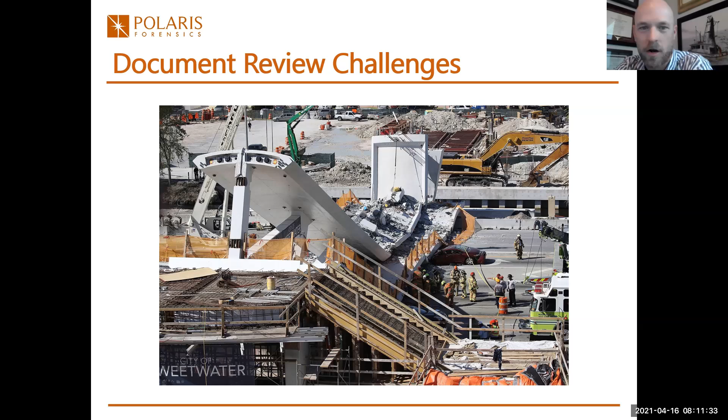So for some projects, probably more applicable to public projects, nowadays there's a lot of information that can be found online. Again, using the FIU pedestrian bridge collapse as an example, we were able to track down all sorts of pertinent information just by doing a pretty simple Google search and becoming an online sleuth. We were able to find construction drawings, photographs, specifications. In addition to looking online, you can perform an open records request and track down information that way. So the point of this is that if it's proving difficult to track down information through traditional channels, there are other ways to find things.

Data collection consists of on-site work, off-site testing, and off-site research. Some examples of on-site activities would be photographic and video documentation, collecting measurements such as building dimensions and framing member sizes. It's also not uncommon for some projects to use non-destructive testing techniques to collect data.

An example would be using ground penetrating radar to identify the reinforcing steel layout in a reinforced concrete member. For some projects, it's also not uncommon to collect material samples for testing at later dates, such as obtaining concrete core samples for compressive strength testing or petrographic examination.

Some examples of off-site research would be looking at weather data through various weather sources, looking at soil information through the USDA Web Soil Survey website, and looking at historical aerial images, such as from Google Earth or Pictometry or some other source.

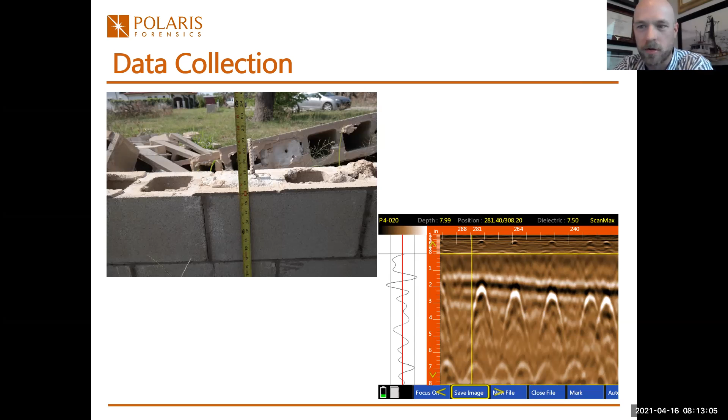Interviewing witnesses isn't always allowed, and that's probably more true for legal projects than anything else. But if allowed, it is important to get a firsthand account of the loss. This not only provides valuable information, but can also help piece together a timeline of events. Let me share a story with you.

Many years ago, I was looking at a high-end residential house for hail damage. When doing hail investigations, a big part of what I'm trying to determine is what size hailstone fell at that particular site. For this project, I had the opportunity to talk to the homeowner and asked some general background questions, including whether she was home during the storm and if she had any idea what size hailstone fell.

She excused herself, went inside her house, and came back out with a Ziploc bag full of hailstone balls. What had happened was that she was home, and after the storm had gone into her front yard and picked up these balls and put them in her freezer. Half my investigation was over because I knew what size hail fell at that site, and I had that information because I had the luxury of being able to interview the homeowner.

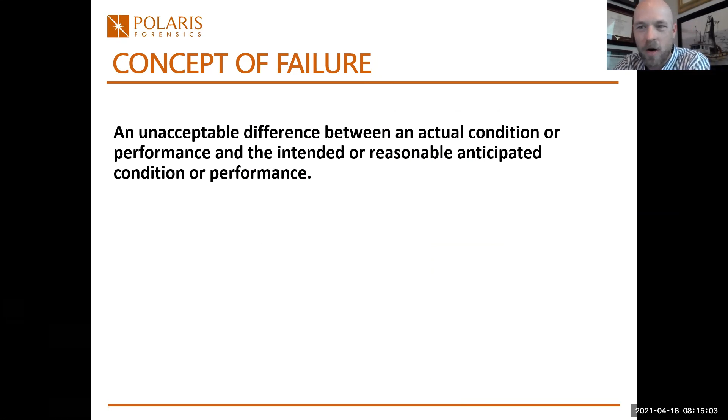The concept of failure is defined as an unacceptable difference between an actual condition or performance and the intended or reasonably anticipated condition or performance. That's a mouthful. Things fail for many different reasons, and I'll walk you through some of the more common causes of failure.

One of those causes is material defect. This is a good example that highlights that. This is a clay tile roof that I was asked to look at many years ago for hail damage. You can see in this image that there are all these little surface spall marks on this clay tile, and my initial impression was that this could possibly be hail related.

But I was able to lift up this lap seam, where the upslope tile laps down and over the immediate downslope tile, and that area is shielded and protected from overhead impact. I was finding these same spall marks, which was basically the smoking gun that told me this wasn't related to hail impact. At each of these spall marks, there's a little white dot or speck. It turns out that when they were manufacturing this clay tile material, it was manufactured inadvertently with limestone inclusions, and that limestone material over time absorbed water, expanded, and created these surface spall marks.

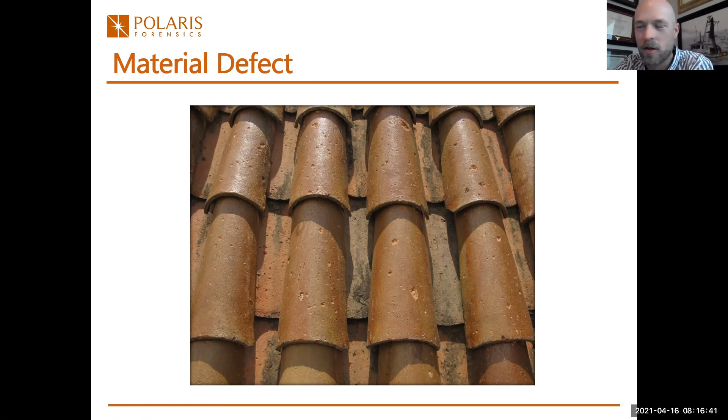This is a good example of what a material defect might look like. Overloading is another common cause of failure, and this almost always happens inadvertently. Nobody intends to overload anything.

A good example of this is I was recently asked by the City of Austin Fire Department to investigate a couple of their fire stations. The fire department at two stations in particular had upgraded their ladder vehicles, and these ladder vehicles were considerably heavier than the vehicles they replaced in their fleet. The fire department kind of did things ass backwards - they upgraded these vehicles.

They were operating these trucks in and out of two fire stations, which had suspended reinforced concrete slabs. All of a sudden a light bulb went off one day, and they thought, well, because these trucks are so much heavier, maybe we should involve an engineer to look at our floor system to make sure it's capable of withstanding this additional weight. So that's kind of where we got brought in.

One of these fire stations was built in the 50s, I think the other one was built in the 70s. Of course, nobody had maintained any drawings or construction documentation, so we basically had to go in and do a full as-built condition assessment from scratch.

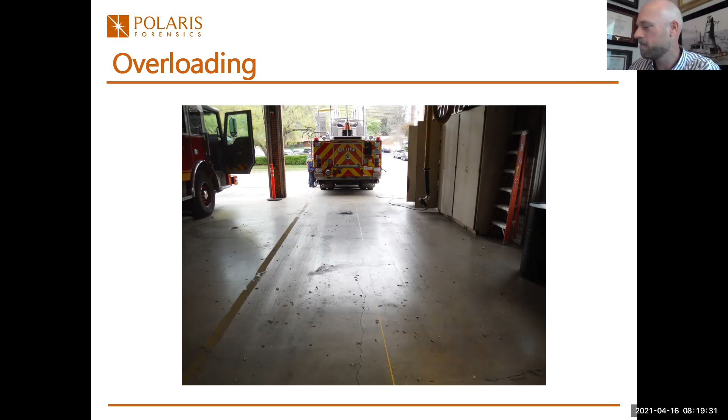As you may or may not be aware, moisture can do all sorts of crazy things. This is a photograph taken in an underground parking garage for a pretty high-end hotel facility in California. What you don't see here in this image is that above this underground parking garage is this pretty massive outdoor recreational space, almost like a big courtyard. In this courtyard, they had a swimming pool and a lot of nice landscaping.

It turns out that both the swimming pool and the sprinkler system for the landscaping were leaking, and water was just pouring into this underground parking garage like it was a sieve. What happened is that over time, that water—and I should mention this is a post-tensioned slab—worked its way into the ducts of this post-tension system, and it corroded and basically failed the PT tendons.

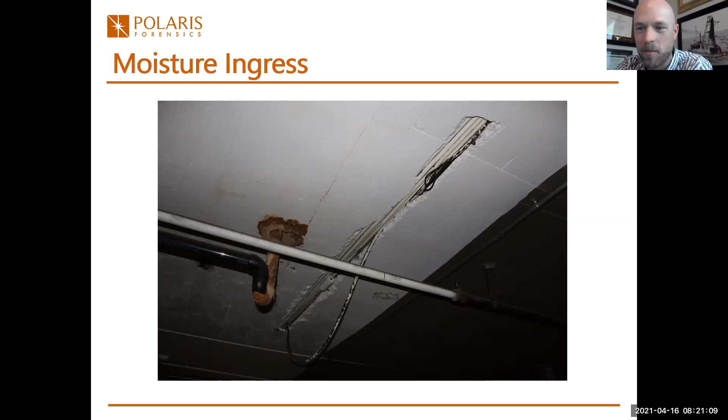I'm going to cover, in a little more detail, the FIU pedestrian bridge collapse. This is a good case study that highlights a design defect. Just as a caveat, there is a lot of active litigation ongoing as a result of this collapse and failure, so I can't provide any insider information. But I will tell you that there are multiple reports out there issued by both NTSB and OSHA, and these are readily available online. Based on my involvement in this project, the findings in those reports are very spot on.

This bridge was constructed using accelerated methods. In this particular case, it was actually constructed in an adjacent yard right next to the roadway. They were able to do that and construct the bridge while keeping the roadway open, basically minimizing traffic disruption.

When that bridge was close to being completed, they moved it into position on the piers. They did that in the middle of the night, closing traffic to the road for not more than a few hours. They moved it into position, put it on the piers, and then it was in its final resting position.

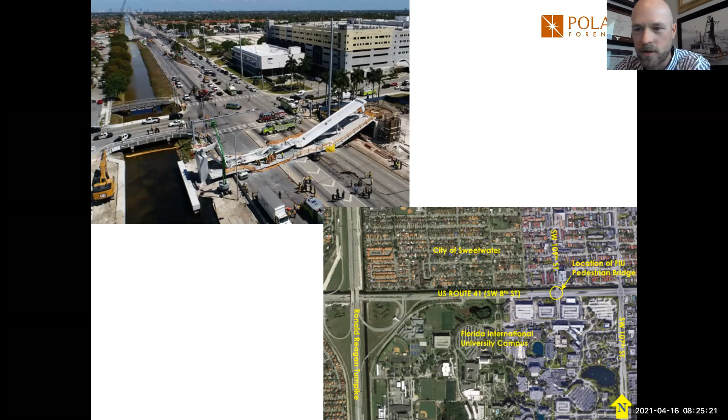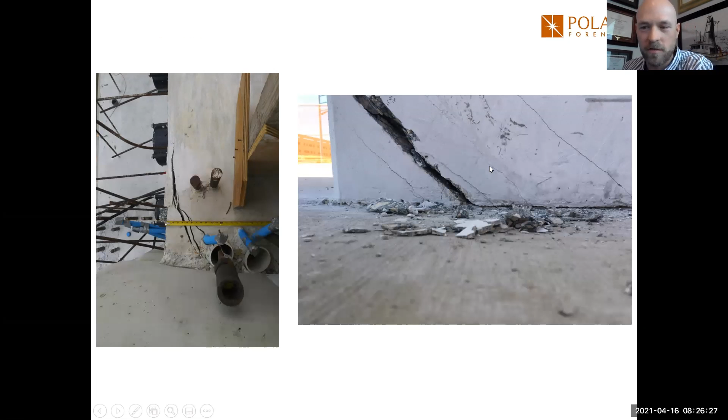To give you some reference on where these cracks are located, this image on the left is a top-down bird's eye view looking at this node right here. I will tell you that this is where the failure initiated. This image on the right is an elevation view looking at the bridge from the side, again at this node at the end of the bridge.

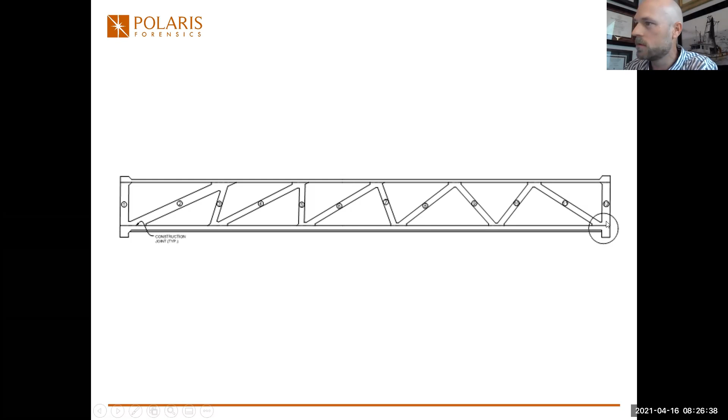This was brought to the attention of the contractor and the design engineer. It's our understanding that FIGG, the design engineer of record, further evaluated this issue. They purportedly did some additional analysis, looked at their design, and for whatever reason ultimately concluded that these cracks were not a safety issue. Because they deemed them not to be a safety issue, they didn't close traffic to that roadway, and they didn't install any sort of temporary shoring.

Coincidentally, on the day of the failure, March 15th, that morning, both MCM the general contractor, FIGG the design engineer of record, and the Florida Department of Transportation were meeting on site to discuss this bridge and this cracking issue. Based on meeting minutes we were able to get our hands on, it turns out that meeting adjourned, I believe, an hour or two before this bridge collapsed.

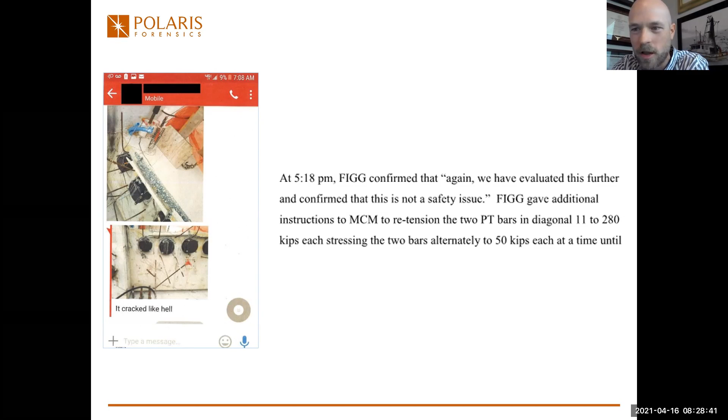It turns out that the shear capacity of that connection was incredibly under-designed. It didn't even come close to being able to withstand the loads that it should have been designed for. It's unfortunate that happened. That shouldn't happen.

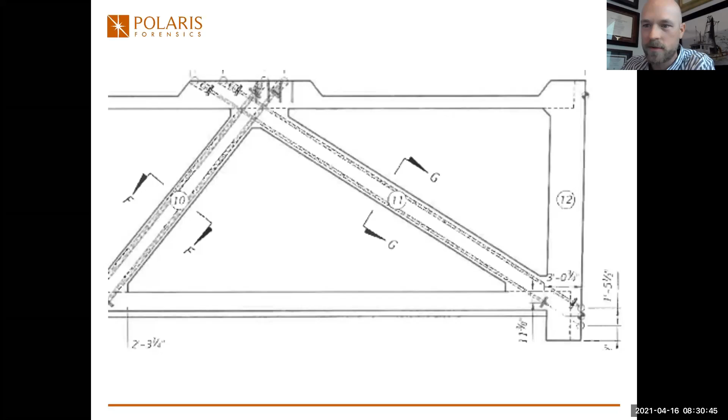All right, so standard of care is also known as the duty of a professional, and it's defined as the level of care normally practiced by a reasonable and prudent professional under similar circumstances during the same time frame. In other words, as a design engineer, am I using applicable codes and standards that another prudent engineer would use to design some sort of structure or member? I also want to mention that if this standard of care is not met, the design engineer can be found negligent.

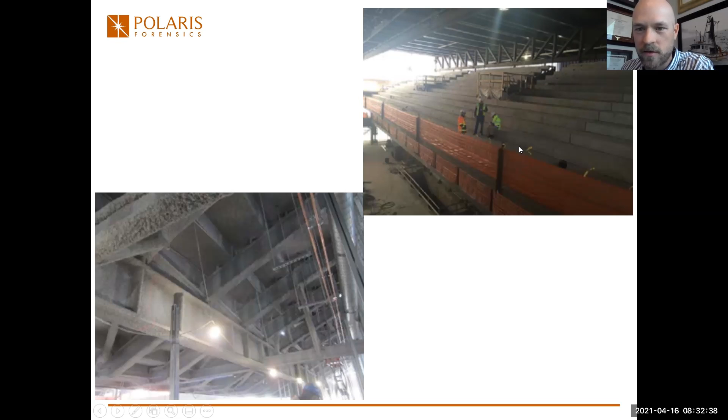This is a predominantly steel framed structure. So you've got these inclined steel rakers that are supported on pretty massive steel girders that are further supported on steel columns. And the seating for the balcony consisted of precast concrete panels.

So it turns out that almost immediately after this balcony structure was erected, it became obvious that there was a vibration issue. The attorney we were working for on this project liked to joke that there were workers at the edge of the balcony, this thing was vibrating, they got sick and threw up off the side — which didn't happen, it was a tongue-in-cheek comment — but the point he was trying to make is that this wasn't subtle. It was a very obvious vibration issue.

Because they had this vibration issue, the original design team had to design a retrofit, which then had to be installed to alleviate this vibration issue, which it did. But, as is the case with projects like this, this turned litigious. And the owner sued the original design team to basically pay for the delay in the project and the additional cost of installing this retrofit.

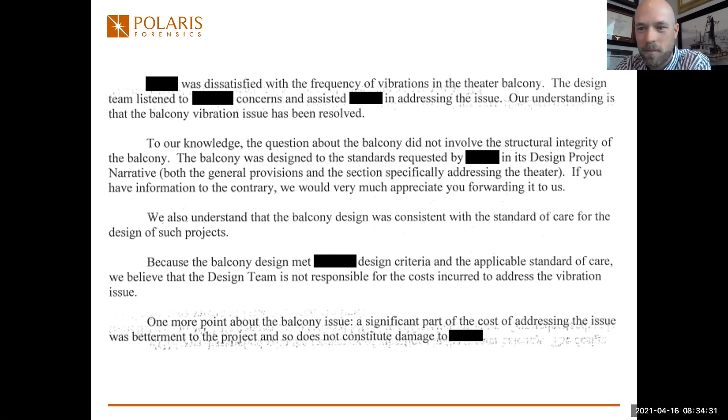The original designer maintained in their defense that because the structural integrity of the balcony wasn't compromised, which it wasn't, the retrofit that had to be designed and installed was considered, quote unquote, a betterment to the structure. So we were asked to investigate this issue to, for the most part, determine if there's a standard of care issue here. Should vibration serviceability have been considered in the original design?

So if you were to look at the structural notes on the construction drawings, it would refer you to IBC 2012 as the governing building code. And section 2205 of that code would refer the reader to AISC 360 for structural steel. Commentary section L5 of AISC 360 says floor vibrations have become an important design consideration.

In addition to that, it refers the reader to this Design Guide 11 document. So in addition to AISC 360, both the Steel Construction Manual and ASCE 7, both very well-known industry standards, also discuss vibration serviceability. And the Steel Construction Manual also references this Design Guide 11 document.

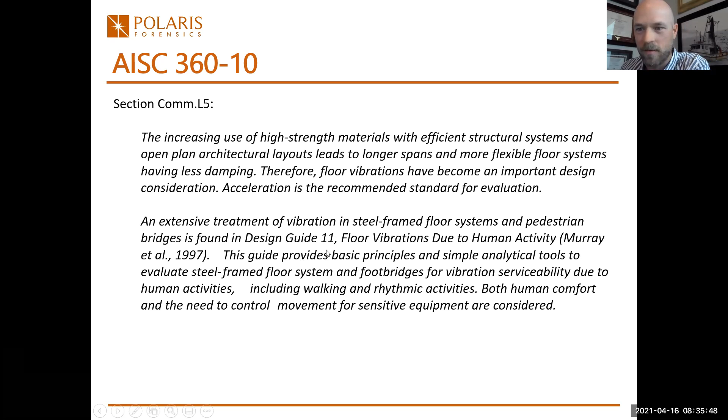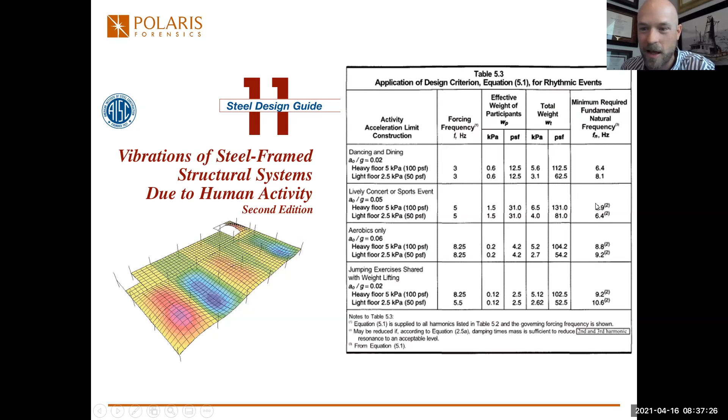So we created a finite element model of this balcony using engineering software. We performed a dynamic response analysis, and based on that analysis determined, drum roll, that the fundamental natural frequency was 3.41 hertz. So if you go back to this table here, you can see that that is fairly substantially less than what it should be.

Well, it turns out that, in addition to our involvement, there were two other experts involved on this case, including the design team's, or the defense's, own expert. And both of those other experts reached the exact same conclusion, that the fundamental natural frequency of this structure was less than what it should have been.

So it turns out that this is definitely a standard of care issue. Vibration serviceability should have been considered. It was a requirement per applicable codes and standards. And because it wasn't considered, they had a vibration problem that had to be fixed. And that retrofit that had to be installed was certainly not a betterment to the structure.

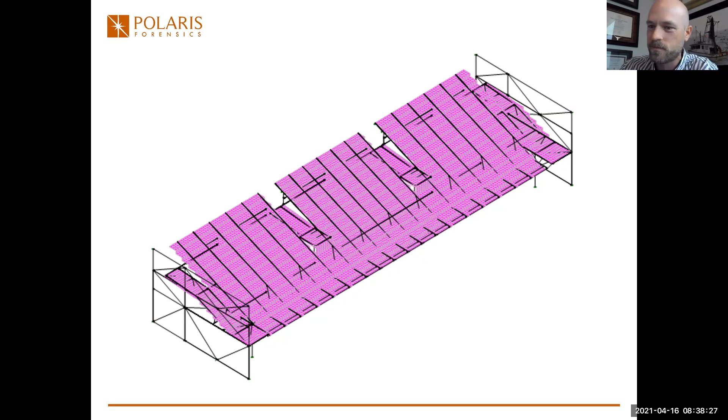All right, so failure hypothesis. During the course of an investigation, hypotheses may be proven, abandoned, or revised, based on data that's collected and analyzed. And it's typically at the end of an investigation where a single hypothesis presents itself that leads to the most probable cause or causes of failure.

In other words, it is critical that our opinions and conclusions as forensic engineers be well supported. And it's also critical that our reports clearly provide that supporting evidence. In other words, don't do this.

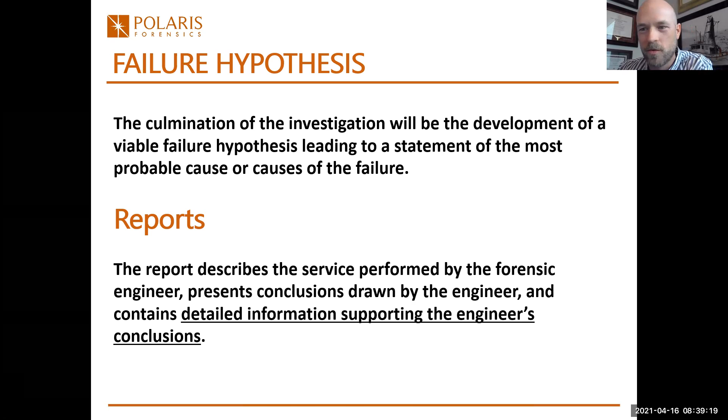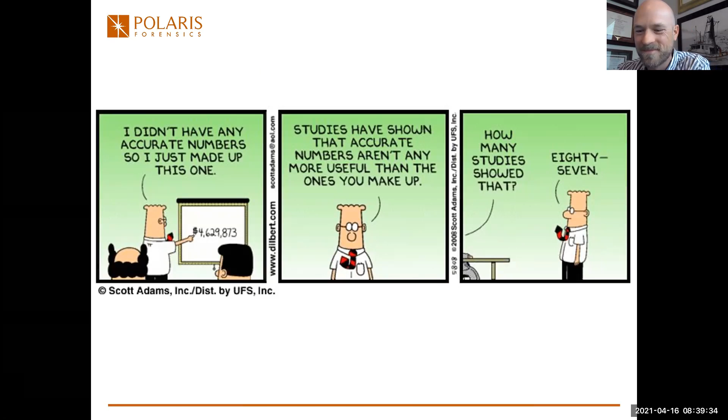All right, so I've got another good case study here. This is a construction defect, and it really showcases testing and data collection to solve a problem.

All right, so this is a fairly well-known resort in the Bahamas. You really had to twist my arm hard to be involved in this project. And the resort had recently resurfaced the deck surrounding one of their pools.

More specifically, they applied what's known as a Tamms Thin Patch material over the existing deck surface to cover imperfections and to re-level the surface. And then on top of that, they applied a Kool Deck material, which was the exposed surface that was supposed to be aesthetically appealing and was also supposed to keep your feet cool when walking on it.

So a little bit of foreshadowing, when these overlay materials are installed, surface preparation is critical.

So it turns out almost immediately after this new deck surfacing was installed, it started to debond, delaminate, and spall, which is what you see here. And this was widespread throughout. I mean, this pool deck just looked like hot garbage.

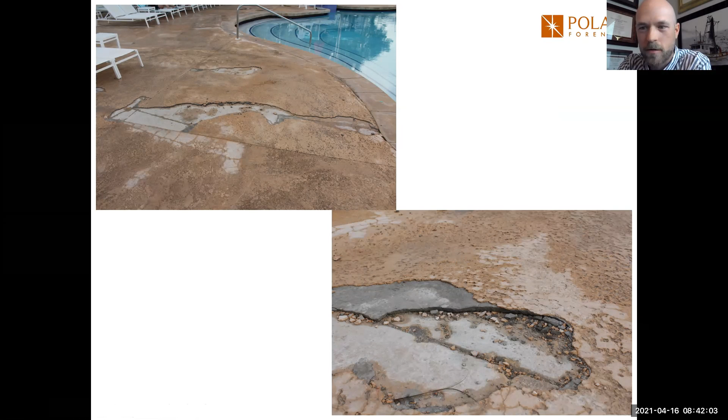So I visited the site. I did a very thorough visual evaluation. In addition to that, we also collected some concrete core samples so that we could perform petrographic examination on them.

And this is now the second or third time I've mentioned petrographic examination. So what that is, with regards to concrete, is that it involves looking at that concrete sample under high magnification. And a good concrete petrographer can identify a number of different characteristics of that concrete sample. They can determine what the aggregate type is, the approximate water to cement ratio. If there's any deleterious reactions going on in that concrete sample, they can see it.

If a core is taken through a crack, a good concrete petrographer can also identify the mechanism by which that crack is occurring.

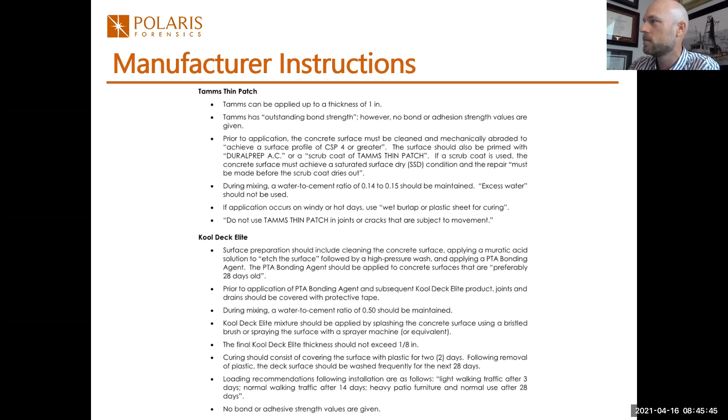All right, so subrogation. Subrogation refers to the process by which an insurance carrier, and it doesn't have to be an insurance carrier, it could be some other party that's involved, collects money from the party at fault in order to recover funds that have already been paid. And I've got a good case study that kind of highlights this concept.

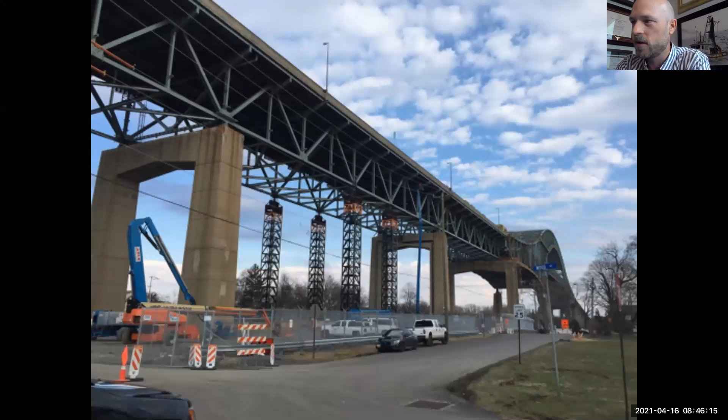So this is a pretty massive bridge up in the Northeast. It spans the Delaware River between New Jersey and Pennsylvania. Bridges like this undergo a maintenance cycle every few years, and this bridge was recently undergoing one of those maintenance cycles. The big ticket item for this maintenance cycle was that it was being repainted.

This repainting process is pretty involved. It involves hanging scaffolding from the bridge. There's a lot of heavy equipment and materials that are used. The existing paint is basically shot with steel shot to remove it, and that steel shot and that old paint has to be collected and prevented from falling onto the ground and into the river. And then it's repainted.

Well, it turns out that during these painting operations, on some random day, painters came across this fractured top chord member that you see here. And you can imagine the alarm bells that this set off and the chain reaction that followed.

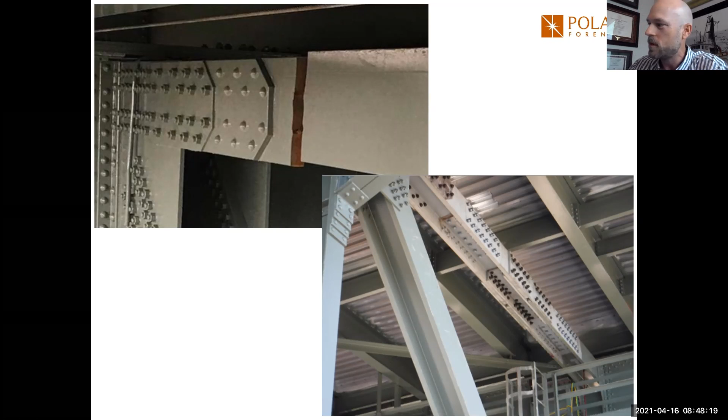So this is a closer up image of that fractured member. I'm not lying when I say this thing was completely fractured through. You could literally stick your hand all the way through there.

Full disclosure, this was a project that I was involved with at my previous employer, and I don't know the final outcome on this, but I will tell you that there was talk of subrogation, and more specifically, the public entity that owned the bridge subrogating against the painters. The reason why they were going after the painters was because, based on some preliminary analysis that we had done, it had come to light that the painters, it looks like, had overloaded the bridge.

As I mentioned before, it's a pretty involved process, and there's a lot of heavy equipment and machinery involved. So they were subrogating against the painters to try to recoup and collect money that had been paid out to not only fix the bridge, but also to collect on tolls that they weren't collecting on.